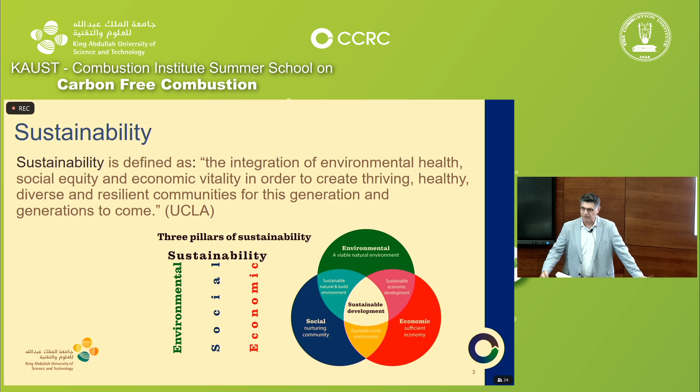Everybody wants to save the world. Everybody cares about sustainability, but everybody misses the point that sustainability has three pillars: the environment, society, and the economy. Of course, the environment is the most critical these days for obvious reasons. But when we talk about sustainability and want to save the environment, we need to also think about other things. We as engineers have been ignoring the other components. Cost matters, people matter, jobs matter. So we need to look holistically at things, not just focus on one thing. So that's my message number one.

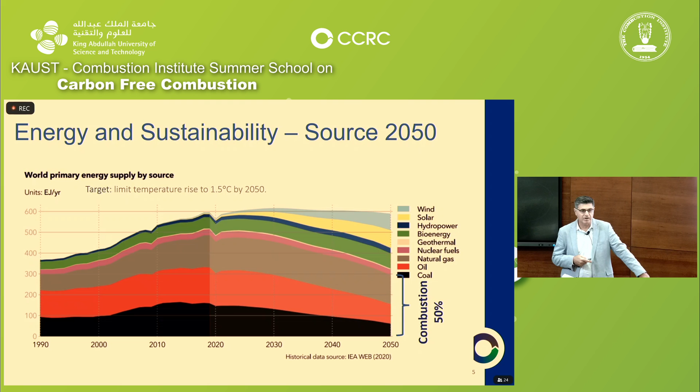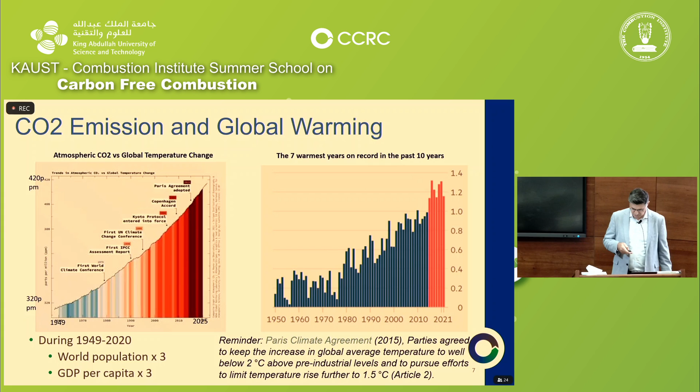This year alone—this is the first year ever, after COVID, where CO2 has not increased. The reason it hasn't increased is because demand has increased by around 8%, but the increase in deployment of renewables has compensated for it. So there are signs that there's a tip-off point coming. Again, on the right, you could see that the 7 warmest years on record are in the past 10 years. So we do have a problem.

In other words, we're not going to meet the 1.5 degree target. In fact, we are going to reach that by 2030, if not earlier. Which then means that we need to do adaptation, and mitigation alone is not going to be sufficient because we need to be able to survive. Remember, when we're talking about sustainability, community matters, economy matters, as well as the environment.

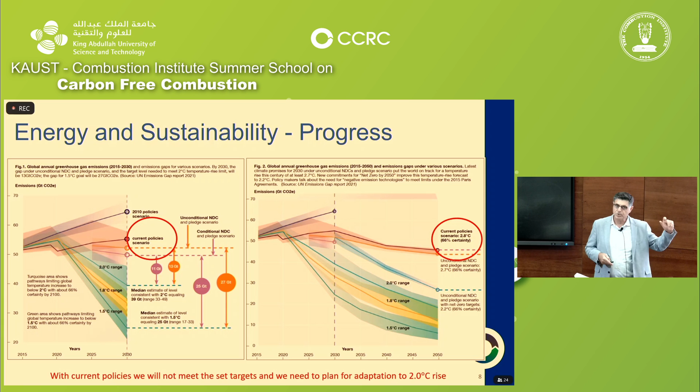So we're heading to 2.8 degrees, which also means that we're not going to reach the 50% contribution of combustion, which means combustion is going to be anywhere between 82 and 50. So combustion will still be needed by 2050.

I'll touch on fuel supply in a minute. But most of the work is focused on industry because not many people talk about it, and I'll tell you why it's important in a minute.

NO and NO2, and SO2 and SO3, and so on. We are trying to reduce NOx and to reduce SOx, yeah? Now the HFO is going to be desulfurized for marine transport, and coal is going to be used less and less, so there's less SOx. So if we remove these, the planet is going to warm up.

We maybe need to thank China and India for keeping the planet cooler. But what this really means is that we need to cater for this larger amount of CO2 in the future, not the smaller amount. In other words, the problem is bigger than we think it is.

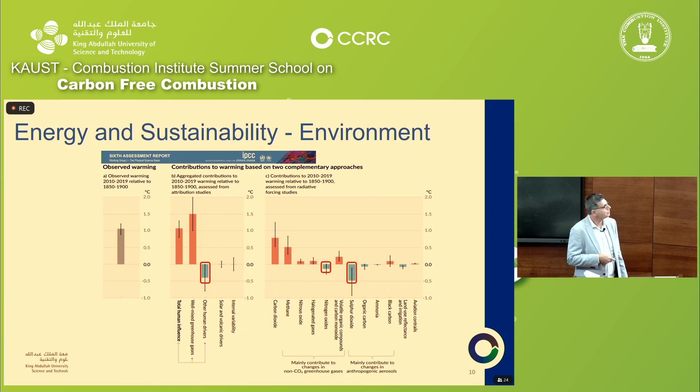It will have direct impact. It doesn't require a lot of investment, and yet we're buying electric cars and investing in hydrogen. This has priority.

Now, if there's any good news, it's that there is a treaty or an agreement that by 2030 they want to minimize flaring or stop it. Now, if it happens or not, that's a different story, but I'd like to draw attention to this. This is important.

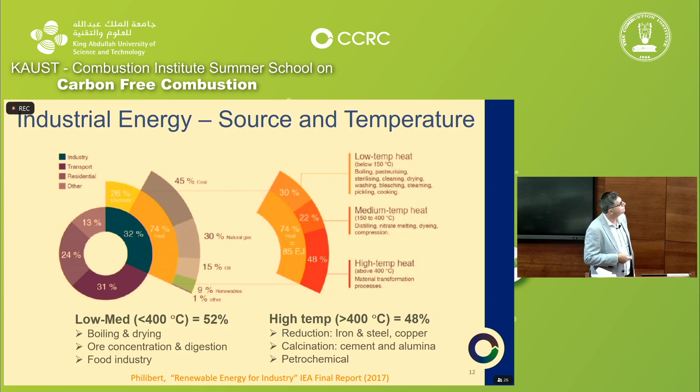So when we're talking about industry, then you need to think about heat. There's a lot of it which is at high temperature, and here's the different processes by which they use this heat. So keep that in mind as well when we talk about industry and the use of combustion.

So if we look at that, we're not too far off, actually. Now, to run electric cars, you need new networks, new powering stations, batteries, electric motors. You need quite a lot of new infrastructure for electric vehicles to become viable. But we have all of that for internal combustion engines. The only thing we need to do is reduce the amount of CO2 from those engines.

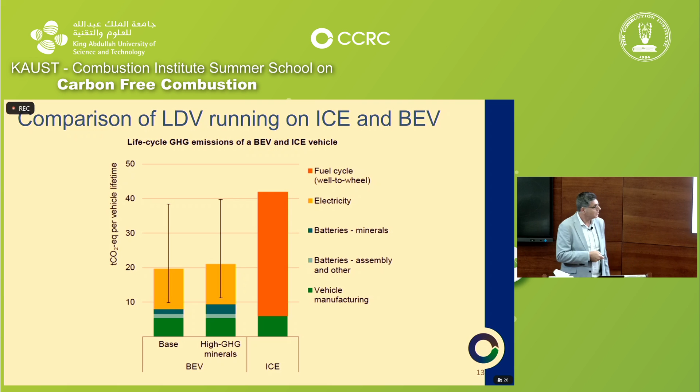Remember, if you want to replace every petrol station with an electric substation to charge all these cars, how big does this substation need to be? Where's the electricity going to come from? And how much is it going to cost, and who's going to pay for it?

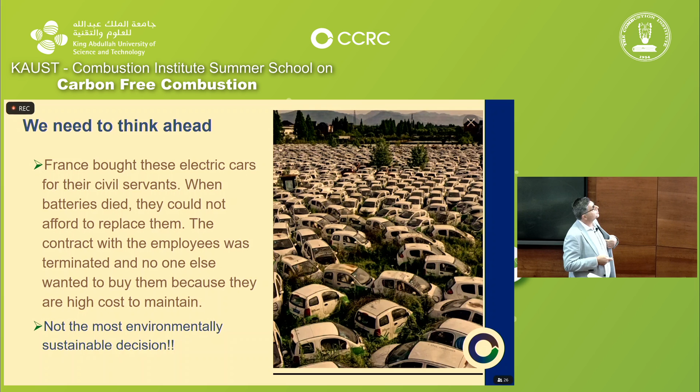Here's an interesting case. So France bought electric cars for their civil servants. When batteries died, they couldn't afford to replace them. The contract with the employee was terminated. No one else wanted to buy them because they're high cost to maintain. Is this sustainable to you?

I doubt it. Now, I'm not against electric cars. Electric cars have a place to play. But if you're in Norway, it makes a lot of sense to buy an electric car because 95% of your energy comes from renewables. But if you're in Saudi Arabia, where only 1% of electricity comes from renewables, then it doesn't make sense. We need to decarbonize the network first before we go on and buy electric cars. And hence, combustion will still be needed.

That's the point. So what do we need to do according to IEA in terms of emission reduction measures? Look at this: 8 gigatons is going to come from efficiency. What is efficiency? R&D, isn't it? So research and development into combustion systems. Why combustion systems? Because 82% of energy comes from combustion. Then renewables, which is happening.

Then fuel switching. Now, if you look at combustion science, a lot of people are working on hydrogen and ammonia, which is fantastic. But just remember, fuel switching really should be fuel flexibility. In other words, I'm going to use the fuel that's available with the lowest CO2 emission at the time. So if I have natural gas available, I'm going to replace heavy fuel oil with natural gas because it has lower carbon intensity. And when I have enough hydrogen, I should be able to replace the natural gas with hydrogen. So it's a transition stage.

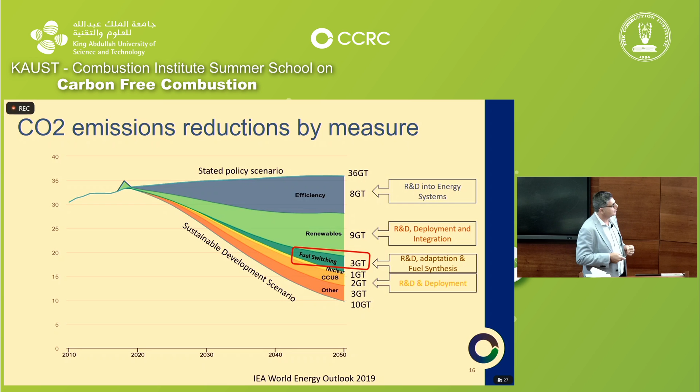So I intentionally identified here what needs to be done, and research and development is needed. All of you, especially the youngsters here, are called upon to actually make this transition happen. In terms of what we need, this is technologies that exist, this is technologies that need to be deployed, and this is how much is under development. The International Energy Agency says that 40% of the technology we need by 2050 is still in the labs, your labs. So take charge and actually make it happen.

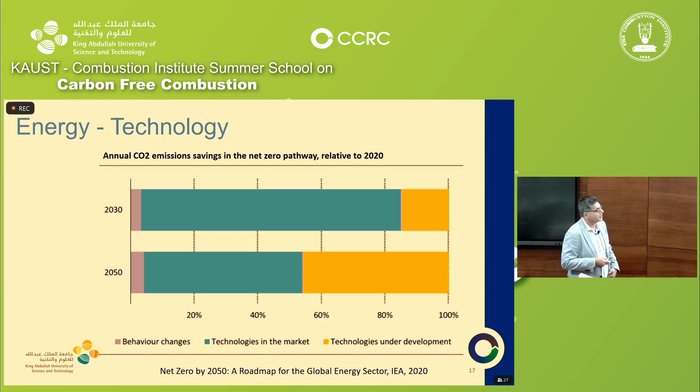And here's another way to look at it, in terms of the technology: what's available, what is needed, and prototypes and demonstrations and so on.

And let me give you a message. Combustion is an energy conversion process. Fossil fuels are the problem. If tomorrow we don't sell any internal combustion engine cars, by 2050 we'd make no difference, because there's 1.4 billion cars already on the road. The problem is the fuel, not the engine itself. Let's replace the fuel, let's make more efficiencies.

Combustion accounts for 82% of energy, and by 2050 it's supposed to account for more than 50%. And I showed you that we're going to reach 2.8. In other words, combustion systems are going to be in use. Combustion has been optimized and used for more than a century and is responsible for human development and advancements in society, for sustainable development. Combustion will be needed in any sustainable scenario for high temperature industrial processes, aviation and marine transport.

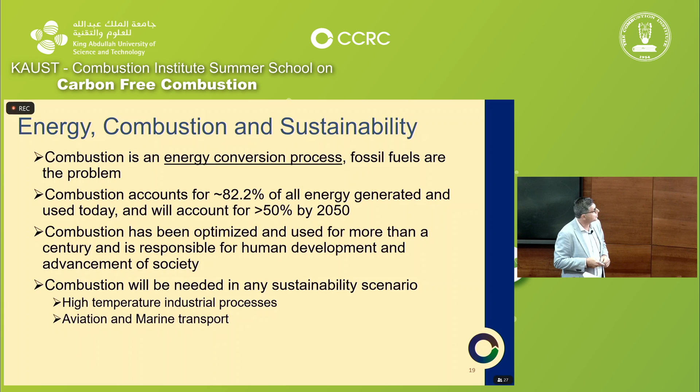There will not be effective electric planes, full stop. There will be some toys to play around with, but they will not be effective. Most of the emission from aviation is from long-haul flights—Australia to London, Saudi Arabia to New York, and so on—and those will never run on electricity or hydrogen for that matter. What we need to do is SAF, sustainable aviation fuel, synthetic fuel that could go into existing systems, and we could do that using electricity. But trying to change the whole system into electrification or hydrogen is not wise in my view.

Firming power networks will be needed for combustion, and production minerals are needed for renewable technology. How are we going to produce the batteries? A small battery in a small car needs 150 tons of dirt to produce one battery, 150 tons. So now let's talk about the millions of cars we want to sell and how many tons of dirt we need to turn to extract the metals to do it. We need combustion to extract all those, to build the fuel cells, the batteries, the electric motors, the networks, and so on.

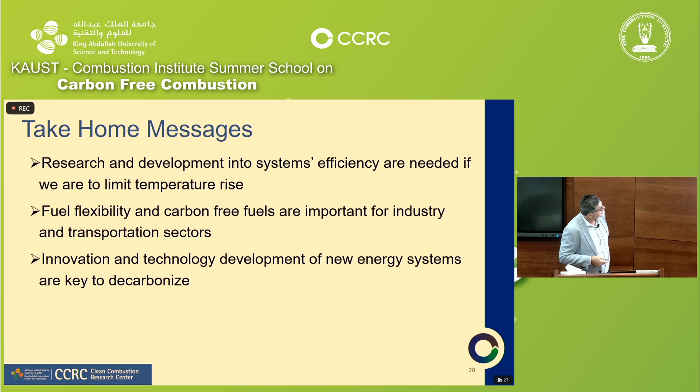So here are the take-home messages. Research and development of systems efficiency are needed if we are to limit the rise. Fuel flexibility and carbon-free fuels are important to industry and transport sectors. Innovation and technology development of new energy systems are key to decarbonization. Synergies, hybridization, and fresh thinking are all needed to get there.

Now, I promised Diana I'll allow one or two questions before I go to the next section. I hope I did not dampen your enthusiasm about decarbonization, but it's good to get reality checks sometimes. The future is bright, we just need to make it happen and not go with the media buzz. Tesla will not save the world. It will make Elon Musk rich, that's about it.

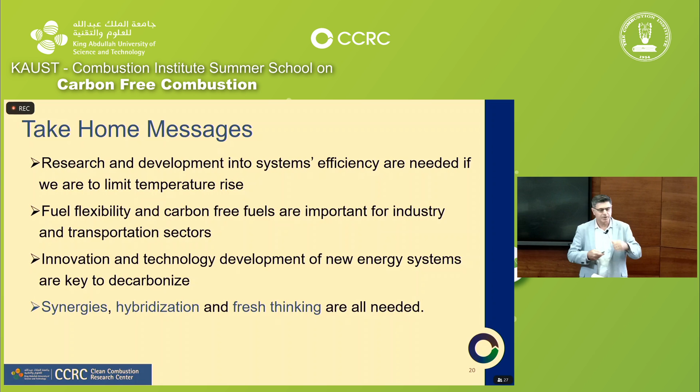All right, so in terms of novel technologies, this is one technology I've been working on for quite a while - it's called mild combustion. I'll explain it in a minute. It gives you better efficiency, better stability, fuel flexibility, and low emissions. Now, I'm ticking a lot of boxes here - less CO2, less pollutants - so it must be a good thing. Let's see how it works.

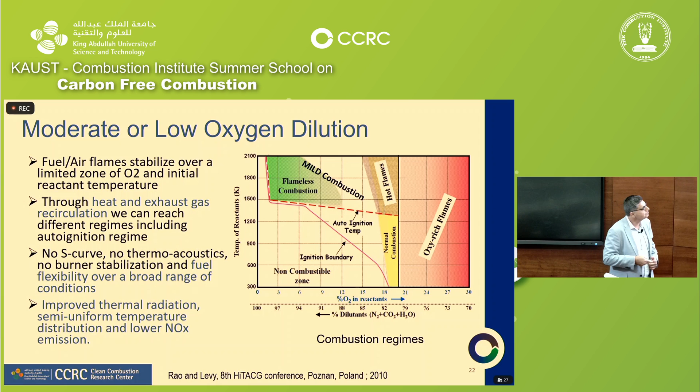There's been a lot of work on the kinetics. Mara de Joannon from the Naples group has done a lot of work, and Antonio Cavaliere did some work here too. What they noticed is the difference between the low oxygen and high oxygen cases is this negative heat release that doesn't seem to happen with this type of combustion. They explained the difference in the structure of these flames.

Here they're talking about how the temperature is above the auto-ignition temperature, but once it ignites, the additional temperature increase from the reactant temperature is below that TAI. This is the S-curve you know about, showing how different oxygen levels in the oxidant stream lead to this continuous ignition. The reaction zone usually broadens — instead of happening intensely in a very small zone, it happens in a bigger volume. So basically you degenerate this S shape, and you have gradual ignition without conventional auto-ignition, depending on where you are in the system.

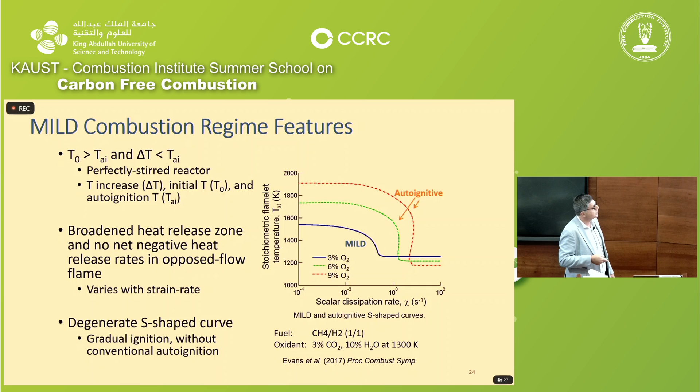So this is what it looks like in real life. This is a furnace that we built. On the left, you have a normal flame — ignore the soot here, it's not important. What we do is have fuel in the middle and air going around it. Normal flame, as you see here, here's the flame, okay?

As we reach above the auto-ignition temperature, we leave everything exactly the same flow rates — we don't touch anything. We just take the air and inject it away from the center line. So the fuel goes into the furnace and mixes with the products, and the air goes in and mixes as well. So when the fuel and air see each other, there's already a lot of products around. But also, the temperature is above auto-ignition, and hence it becomes the mild mode. What you see here is that the flame basically disappears. This is why they call it flameless, or colorless, combustion.

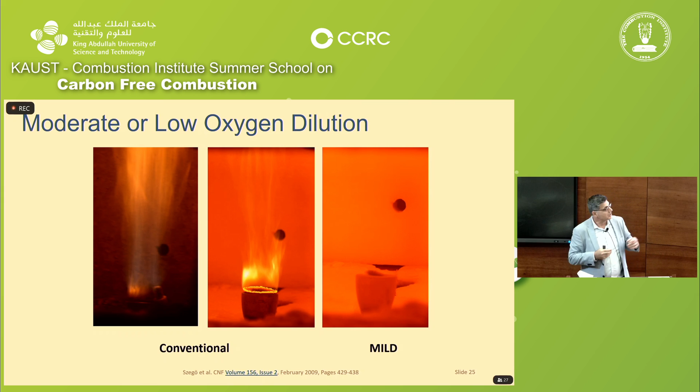What happens is there are spontaneous emissions of certain intermediates that, if the temperature is not high enough, do not emit. You could see how important the walls are in terms of heat exchange with the flame — the walls become red hot. But if you look through, you can't actually see anything. The reaction is happening. Let me just repeat: the same amount of oxygen or air, the same amount of fuel — we haven't changed that, we just changed the distribution.

So why are they different? One is what I described before — it's a normal flame where you have the maximum temperature. And what happens here, when we distribute it, the temperature becomes more uniformly distributed. So it's a lower temperature, but across the whole volume.

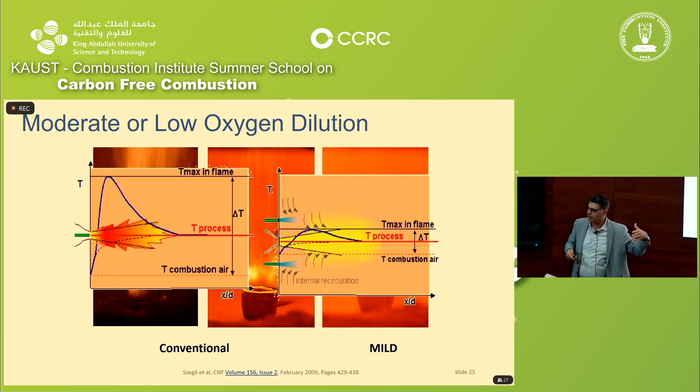Remember how before I said the efficiency is better? Now, instead of having one region that's very hot and the rest relatively cold, we have the whole furnace at a moderate temperature. And if we integrate under the curves, we'll find that total thermal radiation increases, and that's why the efficiency is higher — and more uniform, of course.

Here's another way to prove the point. We've done experiments on all of this: methane, ethylene, propane, oxy-mild, where instead of putting air in, we put just oxygen. Solid fuels too: brown coal, black coal, sawdust, grape bark, almond husks. All of this burns inside this same furnace.

Here's another way to look at it, in terms of energy release, activation energy, and heat release. This shows what happens in the case of mild combustion, and here where there's not combustion, this is where ignition is. You can see these are all the different experiments done, and the numbers here are really the oxygen concentration in the oxidant stream.

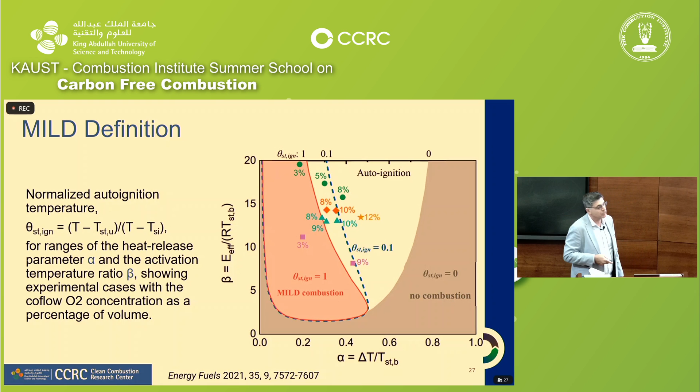This is work we've done trying to understand this. Inside the furnace, it's really hard to make measurements. So what we did is take our jet and surround it with a big pilot. This pilot had the same products as the jet — we're saying if this fuel burns, what would it produce? It would produce CO2, water, nitrogen, oxygen, and so on in the exhaust. Then we ran different fuels in and tried to replicate the mild condition, but under a simpler setup.

This simple geometry lets us do laser measurements in here. This is the type of burner I built — I called it a jet in a hot coflow. The coflow is really products of combustion. I have the ability to change the amount of oxygen in by trading air with oxygen and nitrogen, deciding how much oxygen is in this jet when it actually emerges.

You can see that at 3%, no matter what the fuel is, the bottom part shows flameless oxidation — the flame has disappeared. I'll show you some measurements replicating these mild conditions. As you go to the 9% case, you end up with a normal flame, and this is repeated again for 3% and 9%. While you don't see anything here, if you zoom in you may see a faint flame, but the temperature increase is relatively small compared to a normal flame.

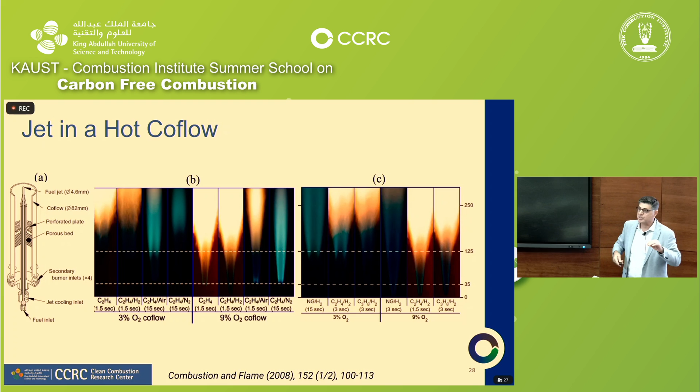We've done a lot of measurements here, both for mild flames and transitional flames. We threw everything at it, from Raman-Rayleigh to other techniques — a lot of measurements. I won't bore you with the details, but basically we were trying to understand the structure of these flames: this is the laminar flames, and this is the turbulent flames we looked at under different conditions, with a mixture of CH4 and H2.

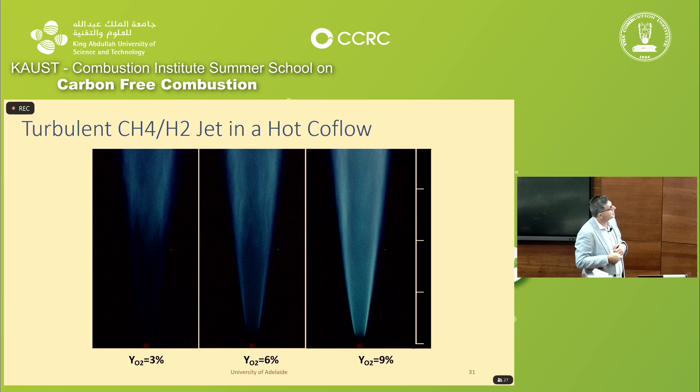We went to Sandia and did single-point Raman-Rayleigh measurements with Rob Barlow. We built our own imaging setup looking at temperature from Rayleigh, OH LIF, and CH2O from PLIF. Some of these flames were sooty, so we also measured the temperature and soot as well as OH, and that was all done at the University of Adelaide.

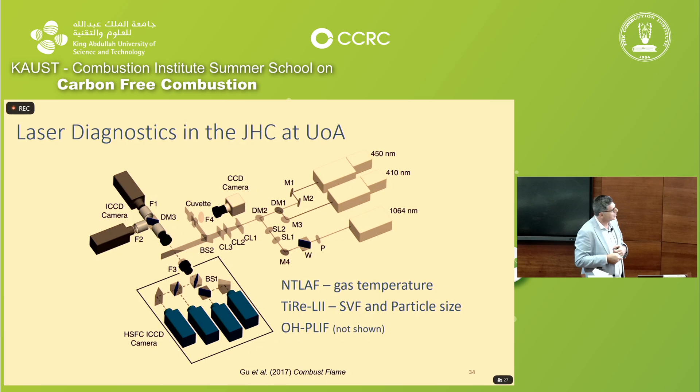We operated with a coflow anywhere between 1100 to 1600 Kelvin, above autoignition. The oxygen ranged quite widely. These are the velocities we ran, and this is the jet Reynolds number, up to 30,000. We tested all these fuels as well, and we also changed the composition of the admixtures we added to the fuel.

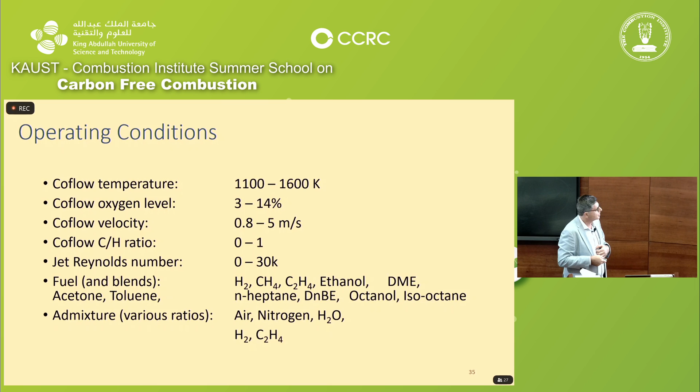We also looked at what the Japanese found to be the best way to do it - they had this alternating recuperative system by which they heat the incoming oxidant, and when they return it, the system takes heat from the exhaust and vice versa. What I wanted to prove is that you'd be able to do it in situ, inside the furnace itself, and also that dilution of the fuel can help achieve mild combustion without having to extinguish the flame due to strain. That was the concept.

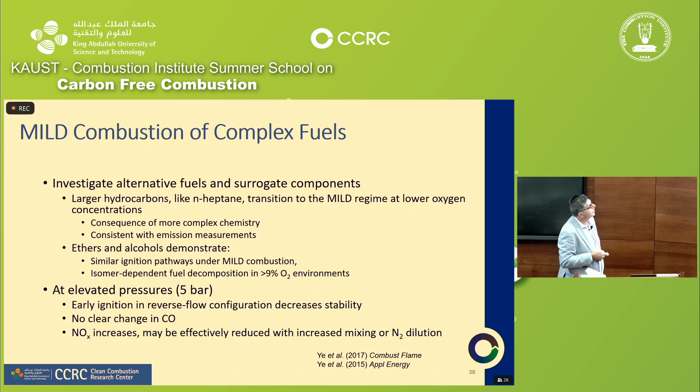So we looked at alternatives. We built a new furnace, and we wanted to understand pressure. We wanted to understand more complex fuels, and we ran different experiments using that. Here are some of the details for some of the fuels we used. You could see that we looked at the structure, the soot, and the temperature, and how it's affected by these conditions, then tried to understand why with higher, more complex hydrocarbons we were getting these soot formations - so there became a whole new area to understand soot under diluted conditions.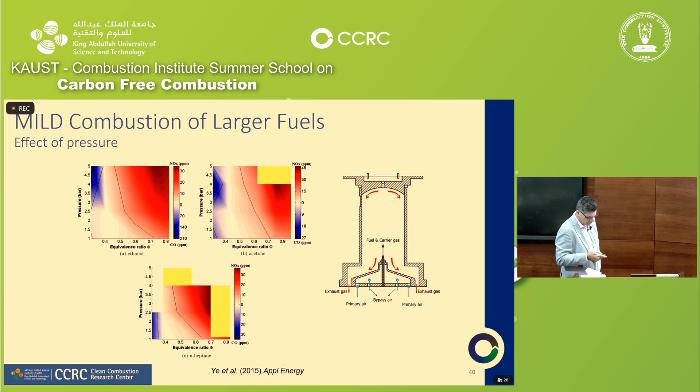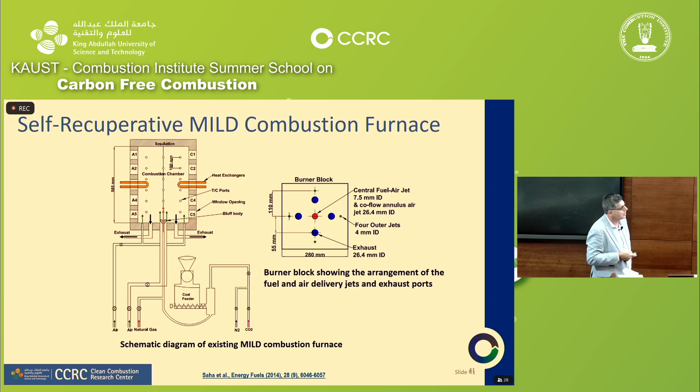We then shifted to actually build our own furnace. Once we tried to understand what happens in these canonical flames, we built this furnace. I explained before how we took the fuel from the center to the edge, and how the things in between were actually the exhaust gases, and how we were able to feed other gaseous mixtures in, or solid particles carried by either nitrogen or CO2. By the way, here we were also extracting energy - we were able to extract 40% of the energy without any problem. We had windows and points to measure temperature. So this is what the furnace looked like, and the heat exchanger, and we had a cyclonic ash collector when we did solid fuels.

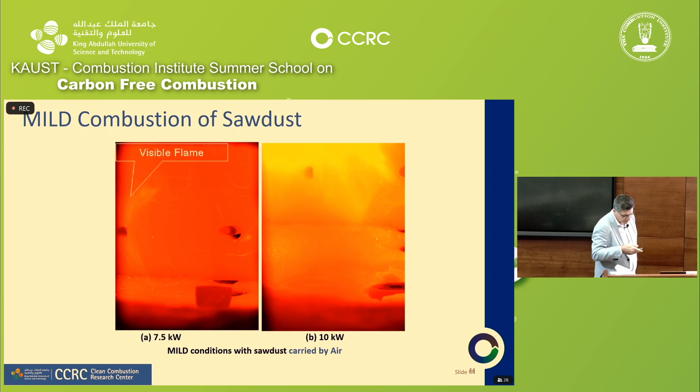Some operating conditions, particularly with sawdust - I want to show you some pictures here. You could see that we were actually able to burn solid fuels using this. It's remarkable that you'd be able to do that. We were able to identify some visible flames depending on the operating conditions, particularly when we carried the sawdust with air into the furnace. But when we carried it with CO2, the whole thing disappeared basically - you could see a few dots here and there of big particles burning. But in essence, we're taking solid fuels and running it flameless, okay?

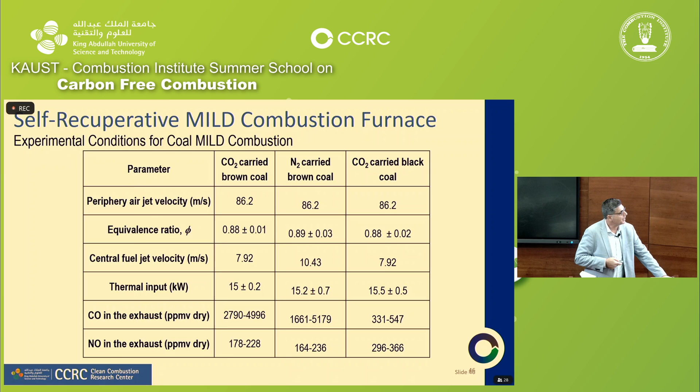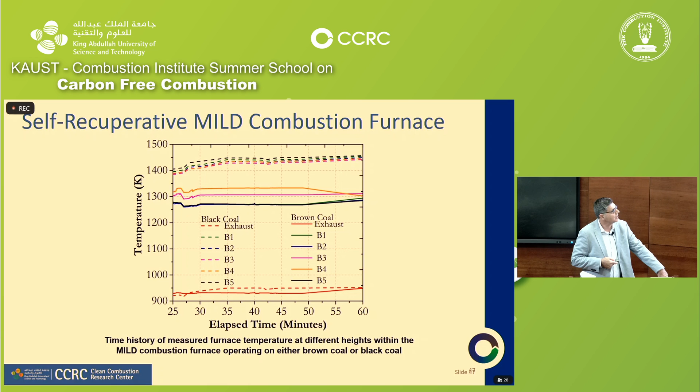And then the NOx was measured, and we were really happy that we had one furnace that could operate under all these different conditions. We also looked at coal, and I know people are going to charge at me - why use coal? But at the time we wanted to understand if it also works for coal and if it reduces its impact. We also looked at temperature distribution inside, and this system is very, very homogeneous in temperature, irrespective of the type of fuel used. I won't bore you with all the details, but you could see the uniformity of the flow within the furnace, within less than 100 degrees difference.

And we measured NOx at different conditions. We were trying to understand if there's any reburn mechanism. We concluded that because there's high temperatures, there's likely to be a reburn mechanism, because we were measuring high concentration at one point, and then lower concentration in the exhaust.

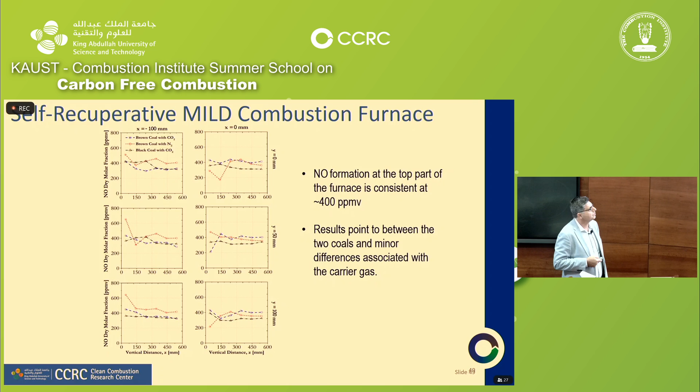We compared those and tried to understand where the NOx is coming from. You could see actually that thermal NOx is very small because the temperature is relatively low, but that fuel NOx is substantial. That's fuel nitrogen bonded to the coal, and the reburn is also active as well.

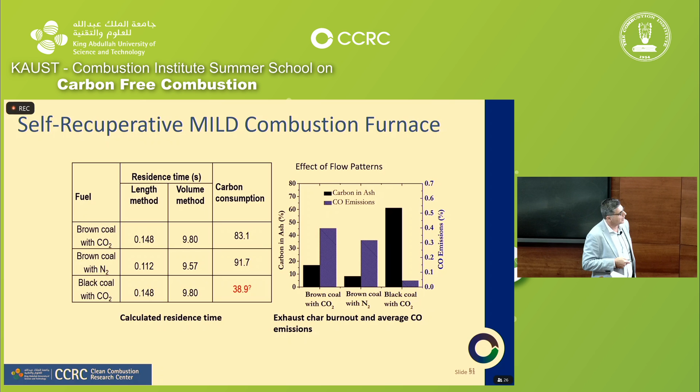We compared them against each other in carbon consumption and so on, depending on what carrier we use.

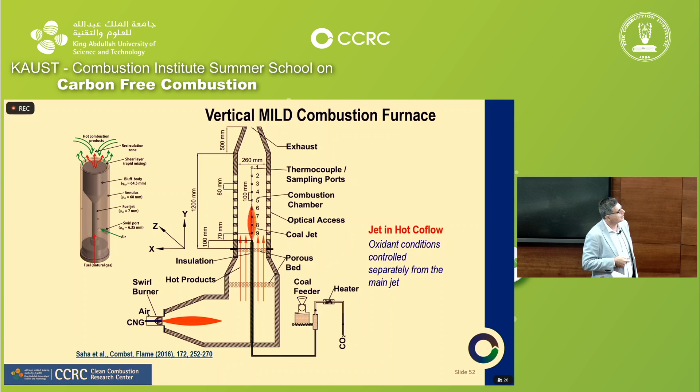We built another furnace, which is much bigger and more flexible in terms of the feeding system, and tested that as well at a much larger scale. Now we actually start looking at biomass, grape marc, almond husk, and brown coal as a comparison, and done all the analysis for them.

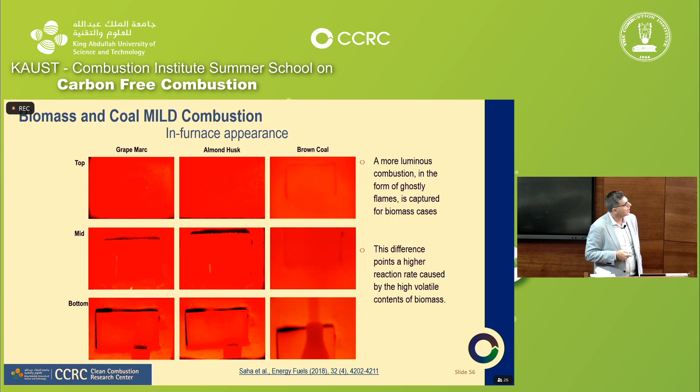I wanted to show some of the results here. You could see that actually we could also achieve mild combustion using biomass as well.

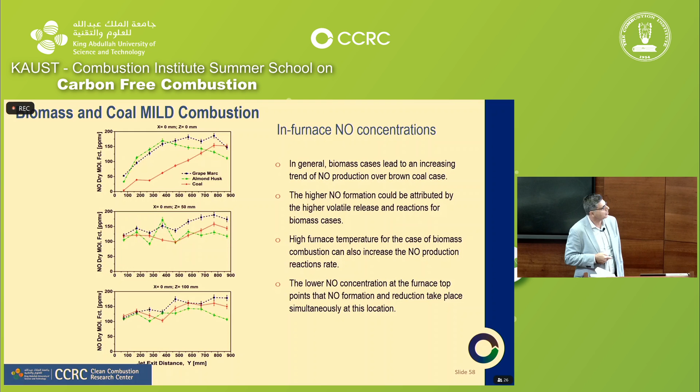Then we compared them in terms of CO, in terms of NO, in terms of oxygen, at different conditions, and how much of it is left, in a way.

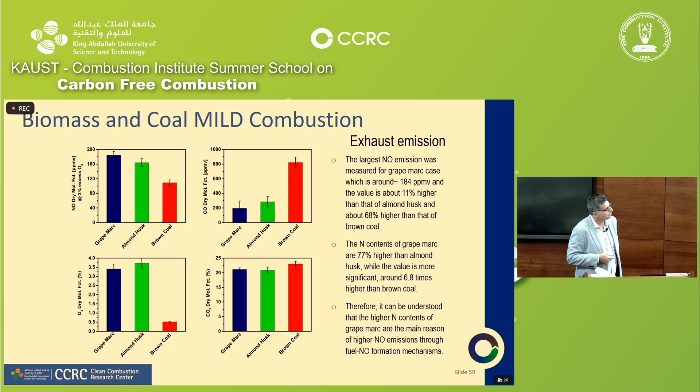So we ran mild combustion, and mild combustion works. It has been commercialized. It gives you fuel flexibility, efficiency, and reduced emissions. Then we came and said, okay, that's good. What else can we do with it?

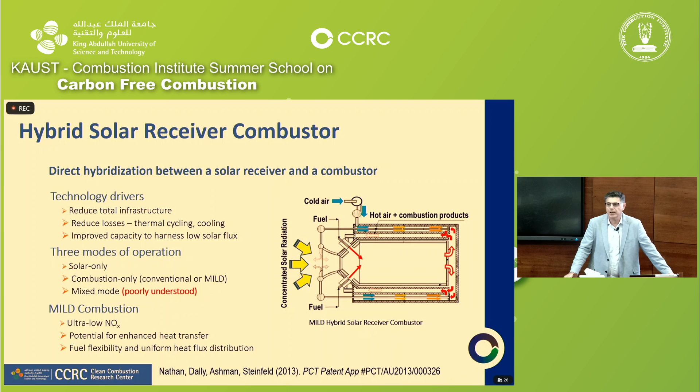We came up with this concept of introducing renewable energy into combustion, so we built this hybrid solar receiver combustor. What we basically said was the synergy between high temperature achieved through concentrated solar and combustion itself.

Can I put them together so I could operate the same receiver either when the solar energy is available, and if it's not, I'll put the shutter on and turn the burners on? Inside, we actually run mild combustion to give us the heat transfer that we required.

So when you combine this as compared to two separate systems, you'll find that you have reduced capital cost - one system, not two. You reduce heat losses, only from one system, not two. You also reduce startup and shutdown losses.

So if you have this receiver, during the day you actually collect energy and it's hot. You're basically going to leave it all night, and you come back again in the morning, so it's going to cool down. This is energy lost, so you need to compensate for that energy.

Increase harvesting of low flux - in the morning, it takes time for things to heat up, and if you need a minimum temperature, you can't start until you reach the temperature you require. With combustion, you could turn it on in a moment and start maximizing on it. There are also options to reduce trace heating, and flexibility for different applications. So it has a lot of advantages.

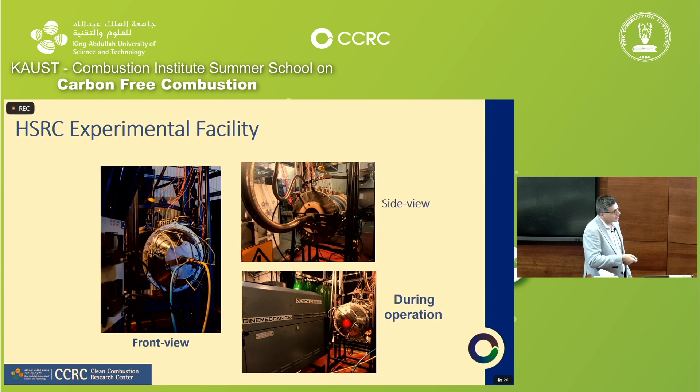We built one - it's actually a cinema projector that we used, a 5 kilowatt, where you directed the energy into the furnace here. And when that wasn't operational, we actually put the burner through this system to heat it up. We had a heat exchanger to try and look at the heat transfer at different positions.

You could see here, we ran it on really different fuels - hydrogen, LPG, natural gas, a mix of those. And we done some research modeling of syngas and ammonia.

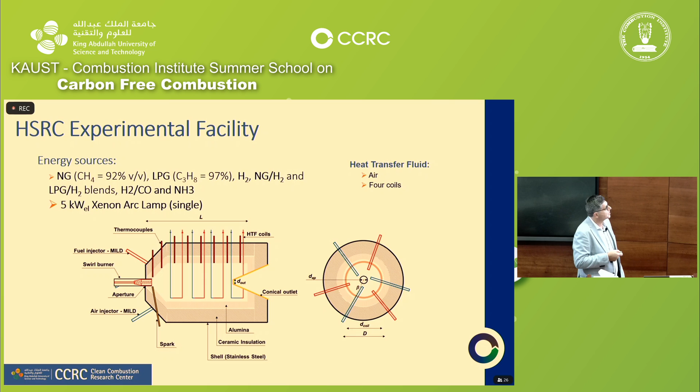So bottom line is the efficiency can be as high as 90%, that we could achieve temperatures of up to 750 degrees C, and we could operate it continuously in both solar and combustion modes, and that the convective losses through the aperture were less than 50% of radiative, with no wind.

You could see here that we ran it on renewable fuels - syngas can be produced from biomass sources, hydrogen of course you could produce and use.

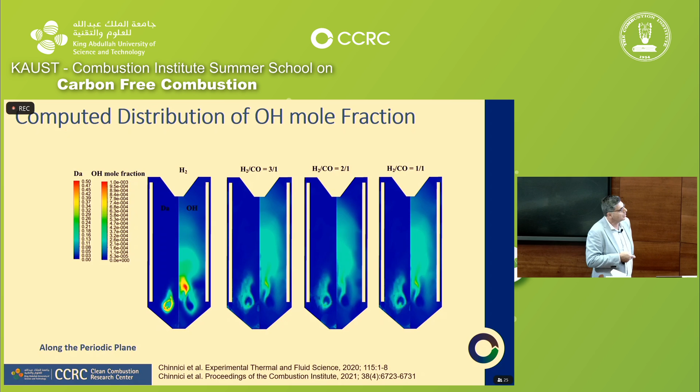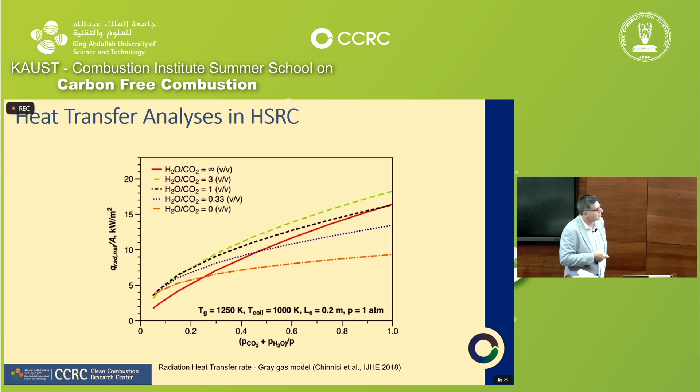Then we looked at heat transfer, and wanted to find the efficiency of those for the different compositions of H2O to CO2. And then basically we compared those for different applications, to realize how much radiation is happening in there in comparison.

More CFD for hydrogen and ammonia. Here's the key outcomes: mild combustion was successfully stabilized for hydrogen, syngas, and ammonia. We found that the Damkohler number is less than 1, giving low NOx and uniform temperature.

For syngas, CO acts as a diluent compared to the hydrogen case. A decrease in the hydrogen-to-CO ratio leads to a decrease in maximum Damkohler number, mean gas temperature, and reaction rates, broadening the reaction zones and shifting them closer to the outlet section.

For ammonia, there's a similar decrease of maximum Damkohler number, mean gas temperature, and reaction rates, and so on. You can see here where our emissions were relatively low, and this is the NOx and where it's coming from.

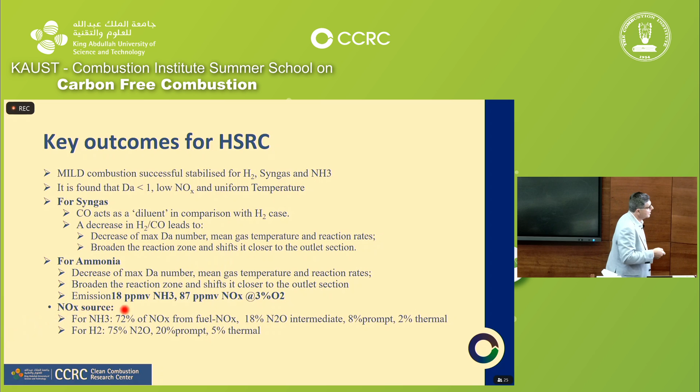Another message here is that combining, integrating, or hybridizing renewable energy with combustion systems is one way to increase the penetration into the system. Renewable energy is expensive and intermittent, but necessary. The way to introduce it is not to shut everything off and build something new, but to actually integrate it. If you can do that within the same system, you save on capital cost, and you actually provide what's called firm, guaranteed supply.

Where this idea came from is we were talking to industry. Industry wants heat or power 24/7 - they don't want it just when the sun is shining. So this allowed us to do that.

Okay, now let's switch to something else - I have half an hour, yeah? Let's switch, and talk about how we use hydrogen in industrial furnaces.

As you know, many fossil fuels produce soot, and this soot actually radiates, and a lot of this radiation is used in industrial processes. Hydrogen flames do not radiate. In fact, fossil fuel-based flames radiate roughly 40% of their energy, while hydrogen is only about 10%. So if I'm going to replace fossil-based fuel with hydrogen, I need a way to increase the radiation characteristics. So we came up with this concept.

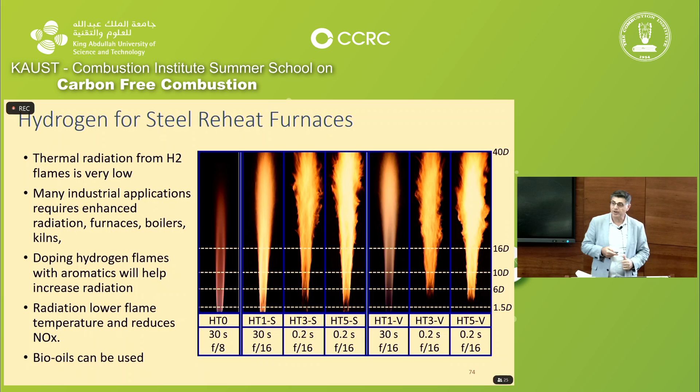So then we had a project looking at how to make hydrogen flames radiate more. We blend it either vaporized or in spray mode. We started with toluene because we understand it, and later shifted into bio-oils. We ran these flames and did some diagnostics on them. This is how the flame looks, depending on whether it's S for spray or V for vapor.

You could see here 1%, 3%, 5% - this is 1%, 3%, 5%, and this depends on whether it's spray or vapor. You can see that when it's spray, there's actually higher radiation or higher soot, mostly because you're creating localized rich mixtures that give you the soot formation.

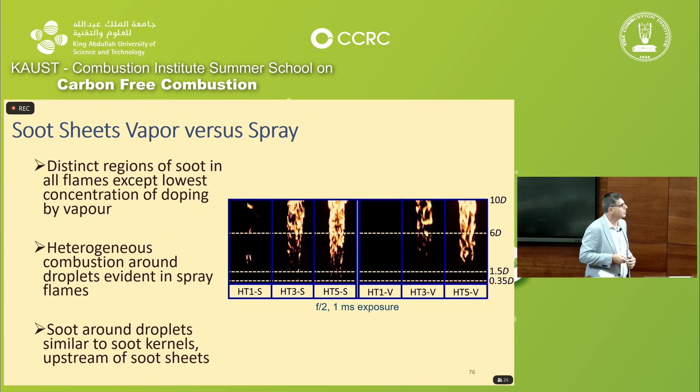We've done some measurements - these are some calculations trying to see the contribution to PAH, to try and understand what we've seen. Some of it is basically a collective PAH signal indicating the precursors to combustion and soot. Then we looked at the mechanisms and identified the different components responsible. A2, formaldehyde, and CO seem to be the major players in how PAH forms.

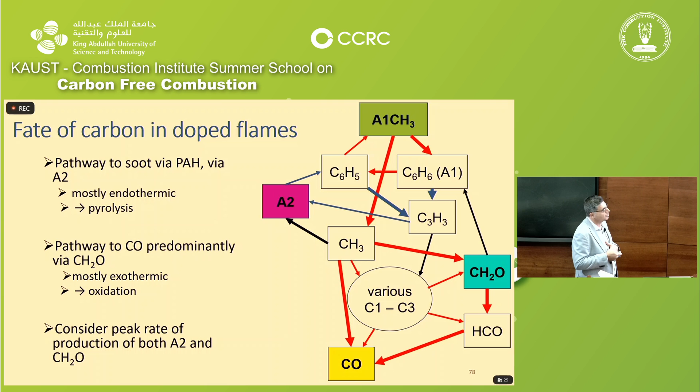We wanted to see which components contributed most and why - this is specifically for toluene. Then we looked at the trends of the addition and came up with the idea that there's a difference between doping and blending. Doping is at low concentration, blending is at high concentration, and those behave differently from each other.

Then we looked at the ratios of formaldehyde to A2 in terms of rate of production as a percentage of toluene dopant, to try to understand the mechanism and why the amount of soot is changing - particularly, it's nonlinear with toluene addition.

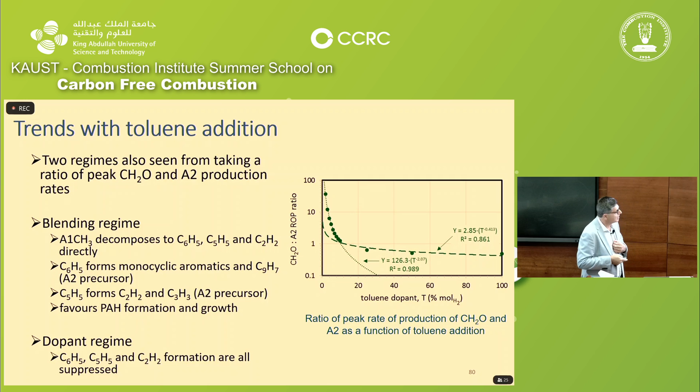So what we're finding is that experimental measurements show soot volume fraction increases nonlinearly with small concentrations of toluene. Addition of toluene at 3 to 5% results in significant soot loading with little change in OH concentration, implying the flame is still burning and all the soot is oxidized. This is explained by rate of production and pathway analysis of formaldehyde and A2, and the combined results suggest that the nonlinear hydrocarbon doping regime should be considered separate from blending - in other words, low concentration and high concentration behave differently.

All right, any questions? Yeah.

The CO2? Well, you mean when you're blending to increase the CO2? We put toluene into the fuel and then we measure the PAH. But you get CO2 out. Yeah, but if it's coming from renewable sources, then the CO2 is neutral.

The idea is that we're going to put biofuels and create soot. If you put fossil fuels in, you're going to produce more CO2, yes. But if this blend is coming from renewables, from biomass, then you don't have a problem.

So another idea is steam calcination. I'm not sure how much you know about producing cement. So what you start with is limestone, calcium carbonate. You're provided with heat, and then you create calcium oxide and CO2. And your calcium oxide becomes cement.

Now here you have two sources of CO2. The first one is in the heat you need to generate to be able to do the calcination. And the other one is the CO2 that's actually separated from the calcium carbonate. So you have two sources. Roughly 40% comes from the heat, and 60% comes from the process itself. So you look at this and say, okay, where can I make a difference?

So of course, if you're burning fossil fuels here, what you're going to end up with is water, CO2, nitrogen, and maybe some oxygen. So one of the major issues with capturing CO2 is separating it from nitrogen. Remember that, it'll be useful for you in the rest of your career. Separating nitrogen from CO2 is a problem, and it's a costly problem. If I can avoid nitrogen, then I'm a winner.

So one option people did is what's called oxy-combustion, oxy-fuel. In that, they take oxygen and fuel, let's say CH4. You'll end up with water and CO2, so there's no nitrogen. So what do you end up with in the exhaust then? CaO, which is a solid, CO2, which is a gas, and H2O, which you could condense. Eventually, you could separate all three of them with very little cost. You just need to recover the energy.

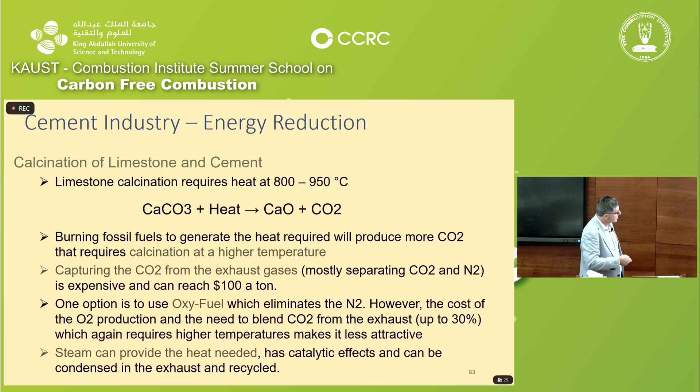So we came and said, okay, how else can we supply this heat without introducing nitrogen into the system? So we came up with the concept of steam calcination. What steam calcination means is that you start with hydrogen and oxygen. You burn them, go through your reactor into the calciner, and then you recover your water, you catch your CO2 and your calcium oxide.

It's a relatively small system. You don't have any heat exchangers. You just need the material to withstand steam at a high temperature and potentially a little bit of high pressure. So this is where we think the steam is going to come from. In other words, I don't have to store hydrogen, I don't have to store oxygen, I only have to store water, and once I have electricity, I should be able to generate my steam. So basically, steam can be generated through the combustion of this.

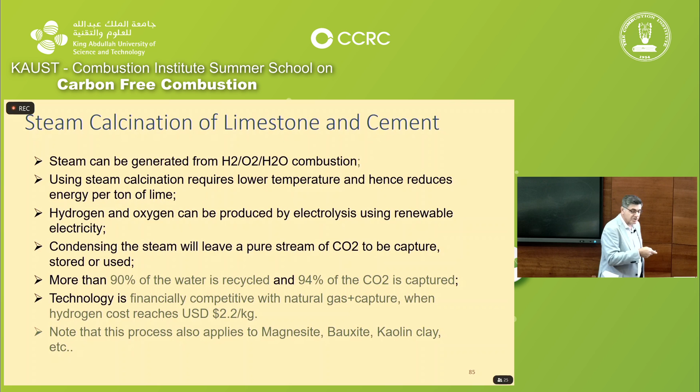This process can actually apply to other things, not just limestone, so I won't bore you with the details. Basically, we've done analysis of what the price of natural gas needs to be per gigajoule for the hydrogen to be viable, looking at different combinations. The bottom line is that if you reach $2.2 per kilogram, you're in safe hands. Here's the added cost to limestone - you'll find it's not substantial compared to business as usual, depending on the fuel cost of course.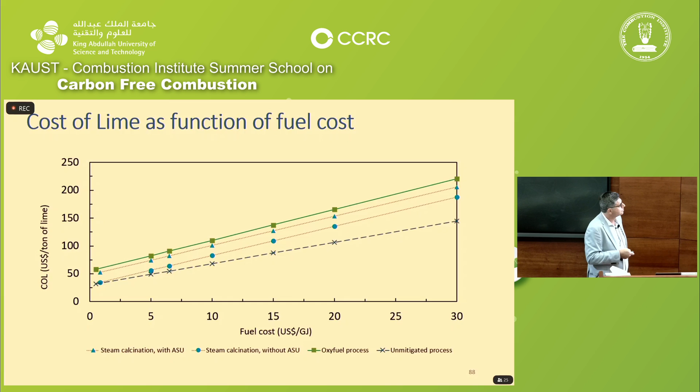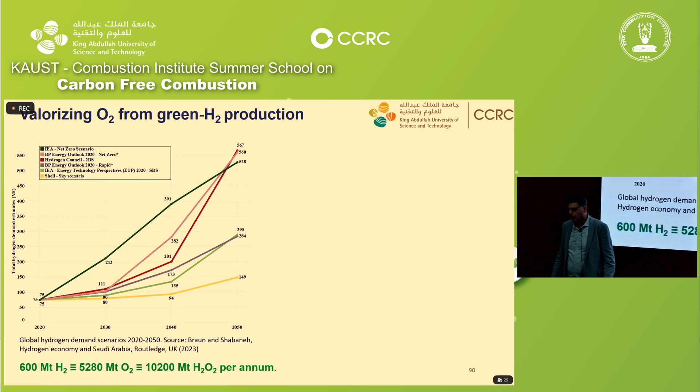All right, the last thing I want to talk about, and I'll do it quickly, is H2O2. According to the International Energy Agency, we're going to be producing 600 million tons of green hydrogen by 2050. Now for every ton of hydrogen, we're going to produce 8.8 tons of oxygen, so we'll end up with 5,280 million tons of oxygen - that's 5.28 billion tons.

Now if this oxygen is released to the environment, it will be harmful. It will affect the ecosystem, increase corrosion, and affect plants and animals. So this is not a good thing. Then we have to ask: what do we do with this oxygen instead of just releasing it to the environment? So venting is no good.

What we decided to do is use renewable electricity to convert oxygen into hydrogen peroxide, and then use it as an oxygen carrier, because the other two options are to pressurize it or liquefy it. When we do this, we also need to find a reason or place to use it, not just produce it. You could also use it to do SMR, ATR, which need both oxygen and steam.

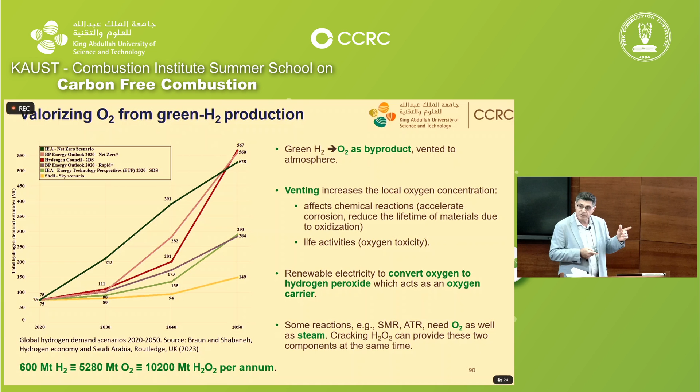Here's a little bit about H2O2, which many of you would have seen in supermarkets - you buy this bottle, it's a very good cleaner because it gives you the oxygen you need. I won't talk a lot about it, but currently it's produced in low concentrations and is actually harmless. At 100%, H2O2 is a rocket fuel, because when you bond the water and oxygen, you store around 5 megajoules per kilogram, and when this energy is released, it's like a fuel. In the past, H2O2 was added to fuel as an accelerant.

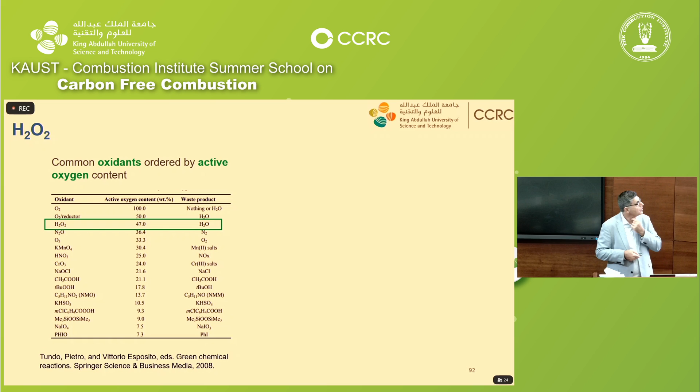What we decided to do is use it as an oxidant, not as a fuel. You can see here, in terms of percentage, H2O2 contains 47% by mass of oxygen, so it is an oxygen carrier. When H2O2 dissociates, it gives you this oxygen back with energy as well - acting as a flame stabilizer to enhance the reaction rate and flame burning velocity through increasing activation and intermediate radicals. That's a well-known thing, and it's been researched before.

So this is where it's been used - I don't want to go through all the different usages. It's now produced at millions of tons, but it's quite popular and available.

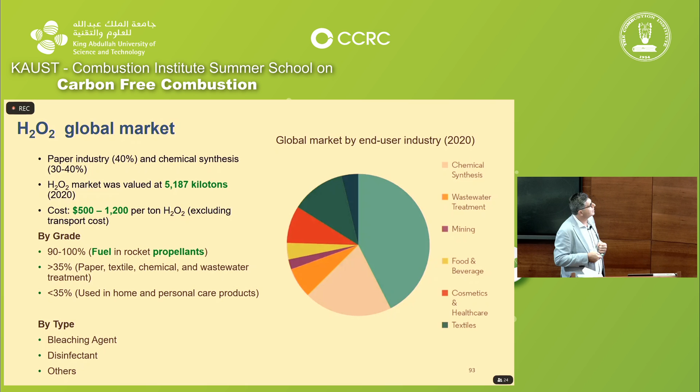Currently it's produced through a process called anthraquinone, which gives basically 95%. But for every ton of H2O2 you produce, you emit 534 kilograms of CO2 - so producing H2O2 today is actually harmful to the environment. But what we're thinking is that you could electrochemically or photochemically produce it, and then use that to combine water and oxygen and carry it this way.

I don't have a lot of time for this - so this is 534 kilograms of CO2 per ton of H2O2 today. So even if we don't valorize oxygen, if we can't find another process to produce H2O2, that will be harmful, not useful, for the environment.

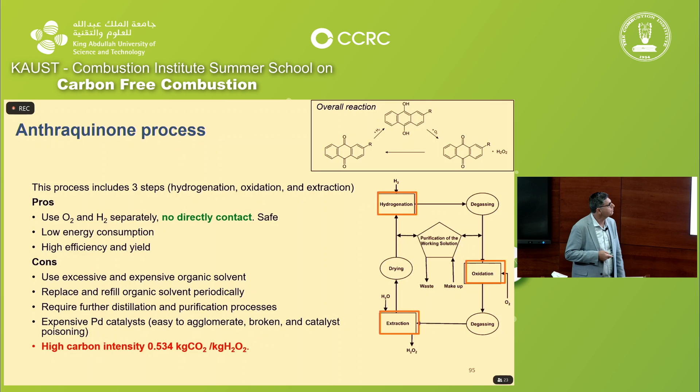Okay, I'm going to skip all of that - I don't think it's of a lot of interest. This is how you produce it, this is the process again. These are the value chain options of what you do with H2O2 once you produce it. We basically reduce risks of stranded assets, reduce life cycle CO2 and non-CO2 emissions, and so on. There are a lot of options, but what I want to focus on is really combustion.

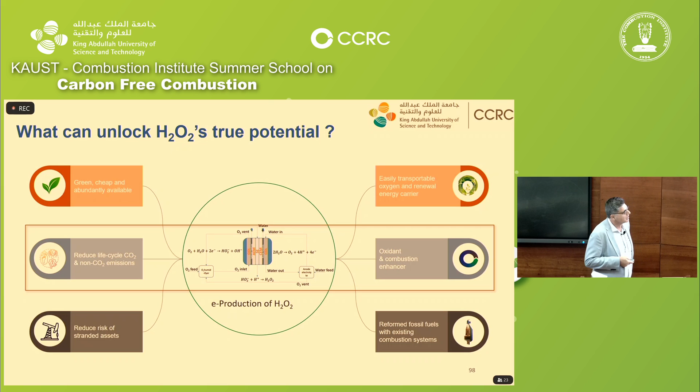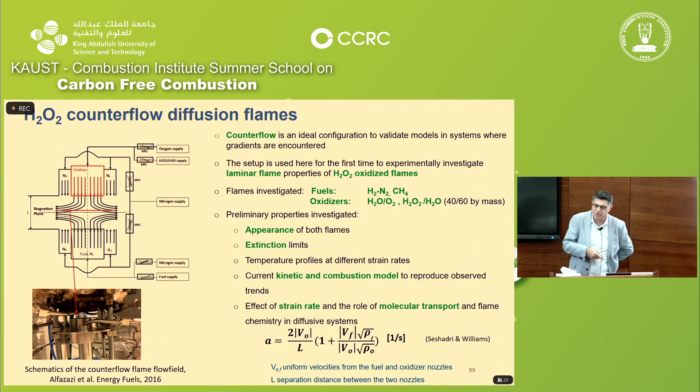So here's what we did - Jun is here in the audience, it's his PhD project. Basically, we took H2O2, mixed it with water at 40% by mass, and burned it against fuel. Surprise, surprise, this fuel actually burns quite well. We changed the fuel composition and ended up with a really stable flame that we were able to measure. To try and understand the chemistry and the contribution of the oxygen, we also did steam and oxygen at the same temperature, to see the effect of the energy release from H2O2 dissociation on the flame itself.

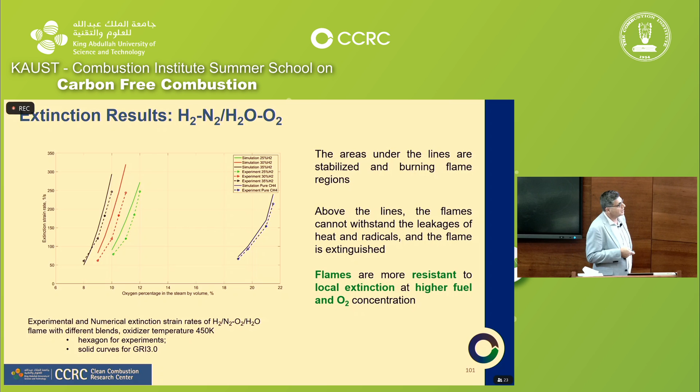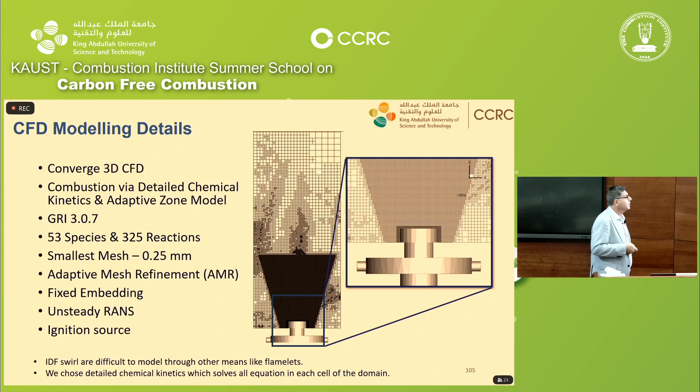And so on. We're also running a swirl burner, and we're trying to build that and use it. I'm going to skip all of this, Diana. This is CFD of these flames. Let's go to the last slide, which is the conclusion. This is some of the work we've done already.

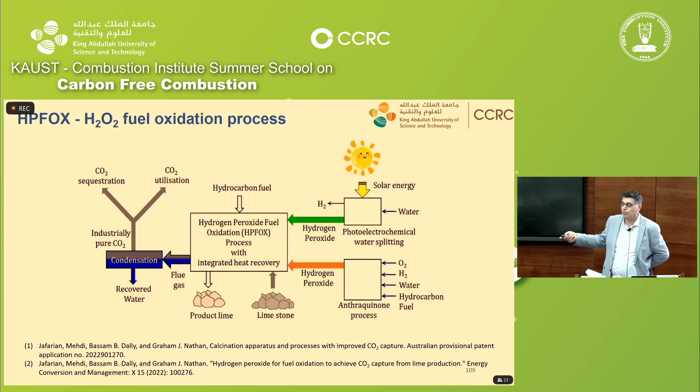Actually, H2O2 can be used for steam calcination as well, for lime calcination, because it gives you basically water and energy, and then you could use steam and energy this way. Again, it produces CO2 and water, and from there on, we could actually separate, remove the CO2, the water, and the calcium oxide.

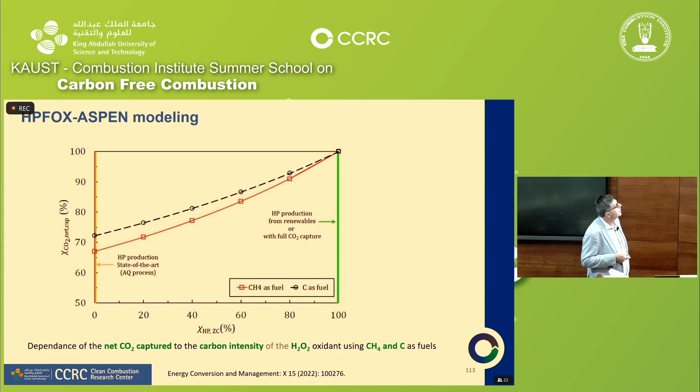Again, this is a patented technology. I won't go into it in too much detail. Let me skip all of this.

So here's the final thoughts. Combustion is key to sustainability. Get this into your head, tell it to everyone you meet. Mild combustion offers solutions to many current problems. Hybrid of concentrated solar and combustion is feasible. Steam calcination offers an avenue to decarbonize cement. Hydrogen peroxide as oxygen carrier and oxidizer shows good promise. Innovation and out-of-the-box thinking will basically lead to impact. Thank you for your attention. I'll be happy to answer any question about any of this.

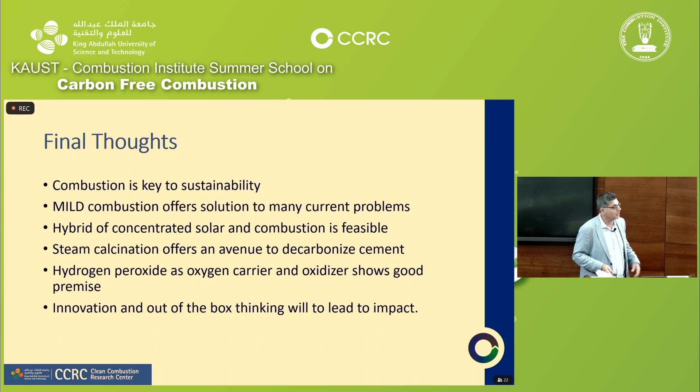Thank you, Bassam. Do you have any question? Okay. Is there people online? Or?

Yeah, thank you, Professor Dally. I had a question. You mentioned that there is an important problem we should keep in mind, which is separating CO2 and N2 - is this only a problem with cement or other industries?

CO2 and nitrogen, sorry, nitrogen. The nitrogen is when you burn with air, you're going to end up with nitrogen. No, this is a problem for every combustion system in the world. Once you use air as your oxidant, you're going to end up with nitrogen. There's another problem with nitrogen: remember, you're bringing in an oxidant which is 79% of your mixture is an inert. You're heating it up to 2000 degrees and cooling it down, but you're not using it for anything - it's actually sucking energy out of the system. It's not participating. So if you could eliminate the nitrogen, then you have much more efficient systems, and you don't have to spend a lot of energy and cost to separate the CO2 from the nitrogen. And this is where the problem is.

Okay, and your proposed solution was using the steam - is cryogenic capture also a possible solution for this problem? You don't need it here because the only thing you need to do is condense the water, and then you'll end up with CO2 as a gas. Because the calcium oxide is solid, you could collect the water, collect the CO2, and collect the calcium oxide. It's just simple heat transfer from there - a relatively simple system, you just need a heat exchanger.